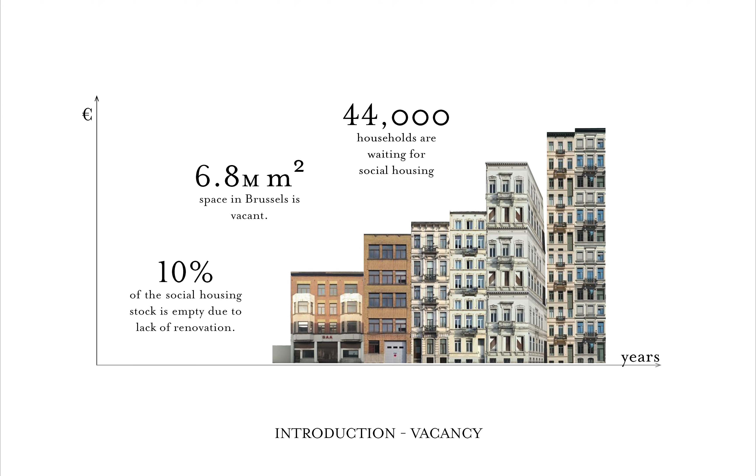In Brussels, around 20 to 30,000 of the existing housing units are simply empty because of property speculation or the owner's inability to obtain a mortgage to refurbish it.

Vacancy accelerates the decay of the building and increases the feeling of insecurity within its neighborhood. Furthermore, there is a higher chance of vandalism and crime, and eventually it makes our city centers deserted.

Owning a temporarily unused property is a problem for its owner as well because of the management costs and vacancy tax. On the other hand, empty properties are urban resources that offer temporary platforms for alternative usage, triggering entrepreneurship, creativity, allowing experimentation, and also being beneficial for the owner.

To figure out the future use and explore the possibilities that underutilized areas offer, city planners facilitate access to these spaces for the citizens living in the neighborhood, to empower and enable everyone to participate in the construction of the city. To help citizens manage the negotiation process with the owner, non-profit organizations started to emerge.

Such an organization is, for instance, Communa, based in Brussels. Their main goal is to heal the urban scars by temporarily occupying and reconditioning vacant places.

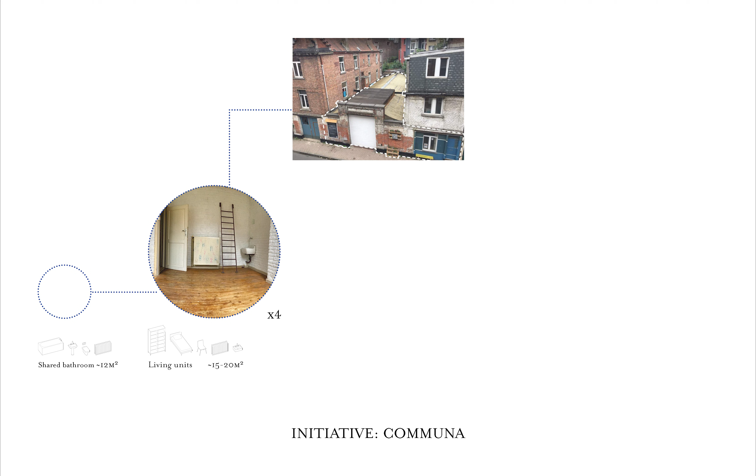This is Lasser, a recently occupied building run by Communa. It contains 4 living units to accommodate vulnerable people, co-working spaces for artists and non-profit social organizations, and a public venue with a community kitchen and a bar based on solidarity economy.

This is the most important place, which gives home to numerous neighborhood activities, public workshops, solidarity and second-hand markets, and artistic and cultural activities.

The recovery of an empty place happens as follows. Upon choosing the next possible building that seems appropriate for such an intervention, Communa contacts the owner of the property and tries to convince them about the benefits of temporary occupation, to let citizens use the property while it remains empty.

They then sign an occupancy contract and Communa co-creates the plans of the occupation together with the neighborhood and the possible future tenants. Afterwards, they refurbish the building to meet the minimal demands with the help of volunteers and the committed citizens of the neighborhood, and occupy and maintain the building for the agreed period, which can be 2 to 5 years.

As an organization mainly consisting of young lawyers and social workers, my role and contribution as an architect to their operation was a central question for me from the beginning.

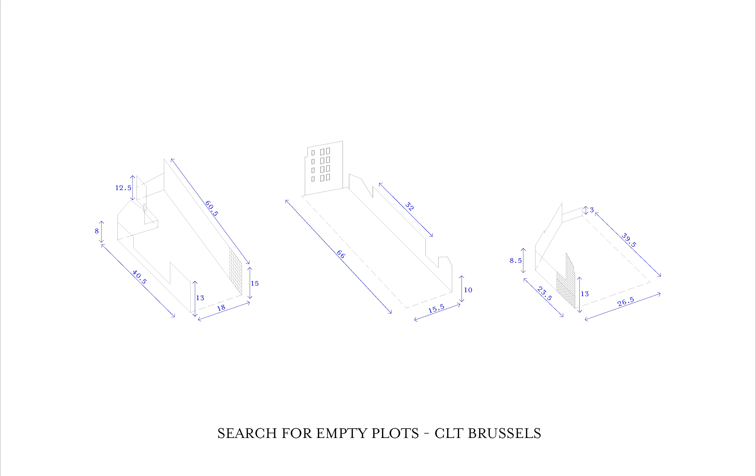geometric characteristics: long, narrow plots perpendicular to the street, with one or two fairly high firewalls on their longer sides, which offer potential for structural support.

Since the design project on the first site is the one that is still in its initial phase, I decided to continue working with this one.

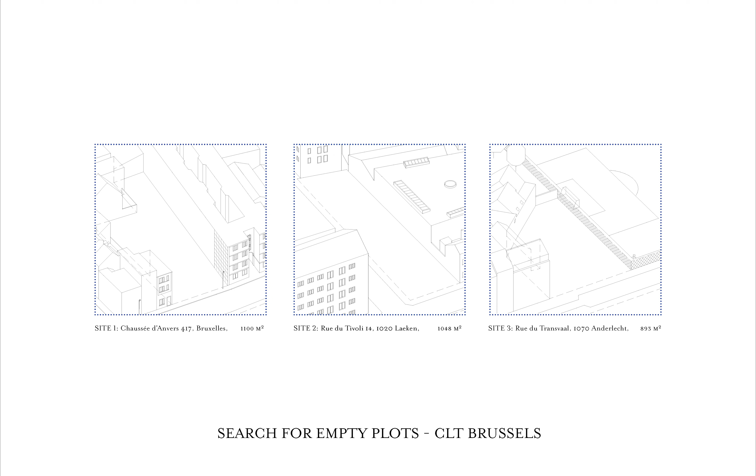The empty plots could be used to house people and families in need of accommodation, and public venues that could host community events and provide job opportunities.

The framework of the project started to take shape as we combined the timeline of Communa and CLT. While CLT is working on the feasibility study, Communa gathers possible future tenants, and together they customize the plans.

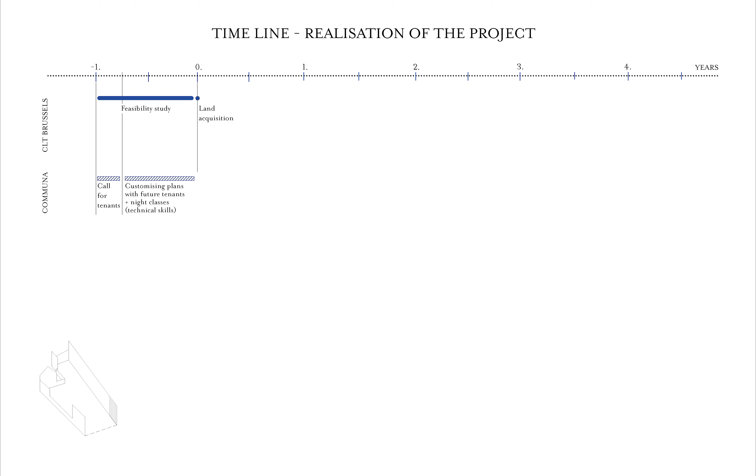The tenants will acquire construction skills on night classes. The construction starts right after the land acquisition. The assembling of the temporary building should not take longer than 1 to 3 months, so even in the worst case scenario, there would be a 2-year-long period of tenancy, but preferably 5 years. The occupation comes to an end just before the construction of the permanent building would start.

These residents could be families from the waiting list of CLT Brussels, or disadvantaged students, young adults, couples, single mothers, or homeless people who already live in shelter and need a bit of help to take the next step.

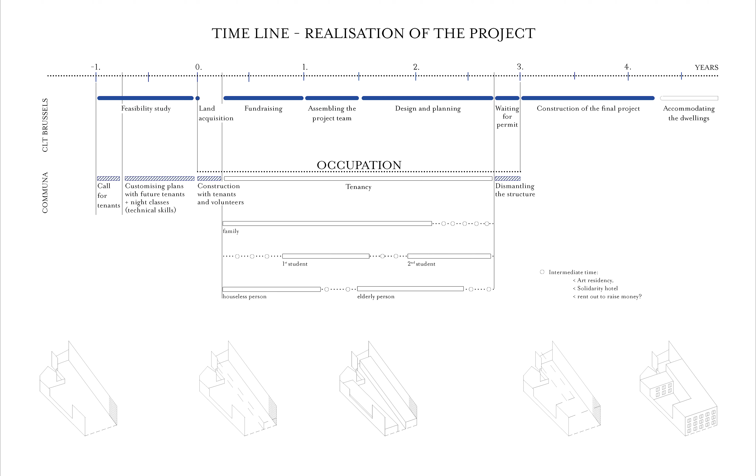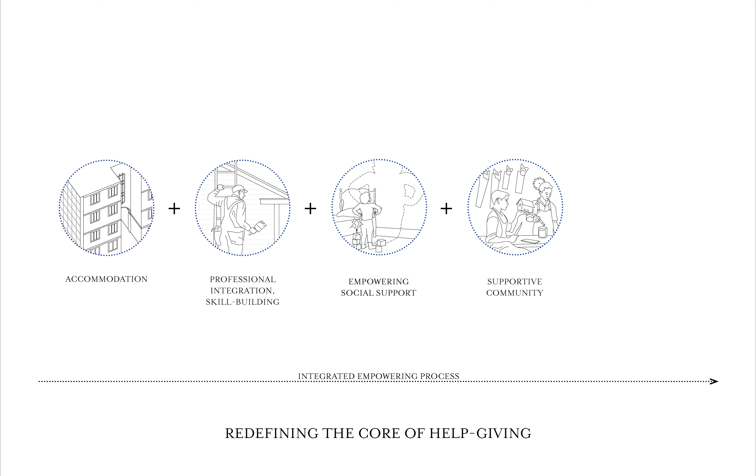The emergency living units don't just wish to offer accommodation, because that alone would not solve the issue connected to precariousness and exclusion. An integrated empowering process is needed where the accommodation is supplemented by social support, professional integration, and skill building. The whole process happens within a very open and supportive community, making sure that till the end of the occupation period, residents will be able to move to the permanent place and integrate back fully into society.

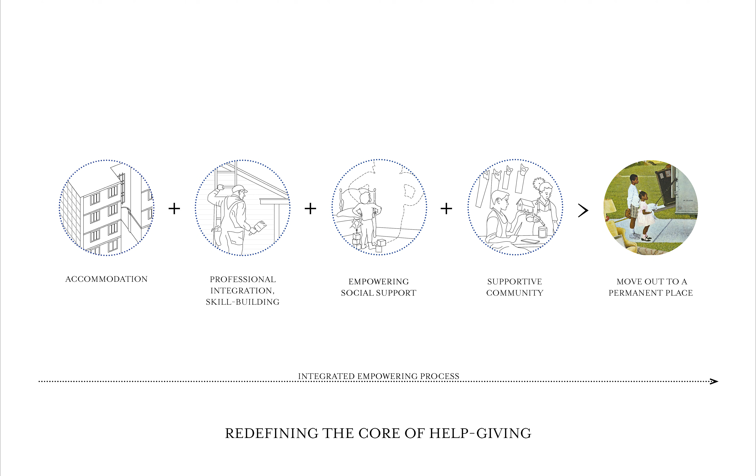Part of this process is that the residents are involved in the construction of their temporary homes, which could give them confidence and a sense of ownership, but also new skills.

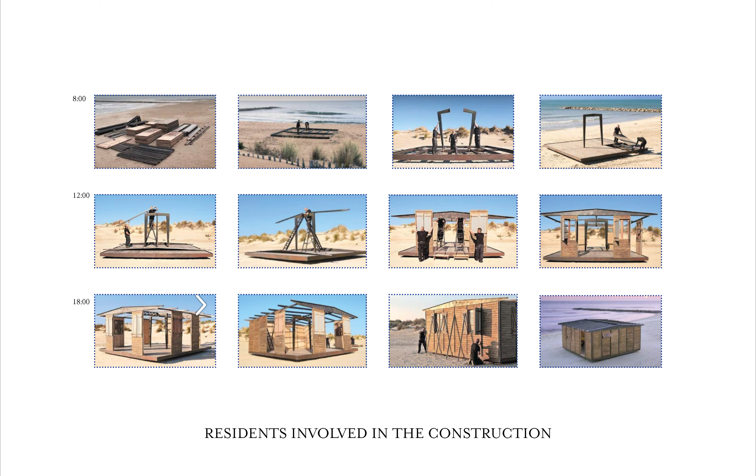Similarly, the aim for the newly formed non-profit neighborhood activities is not necessarily to facilitate the temporariness and travel from site to site, but to find a way to make them feasible and financially independent in the longer term.

To fit these conditions, I collected building components that are durable and have dismountable connections in order to be reusable, can be constructed and dismantled within a really short period of time, and that the elements should be possible to be purchased from regular building shops.

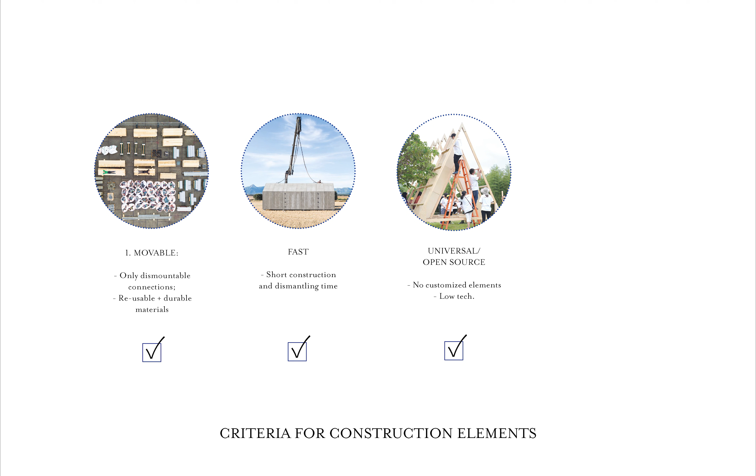At the same time, it should be low-tech, and the assembly method should have an educative community generator aspect. Lastly, it should enable a rich variety of floor plans.

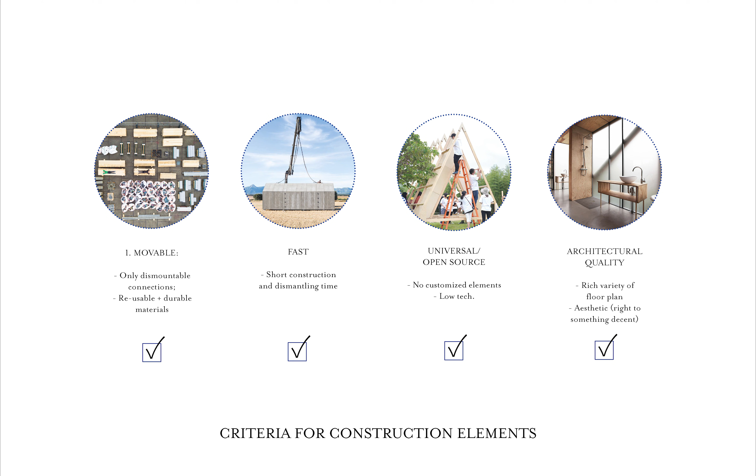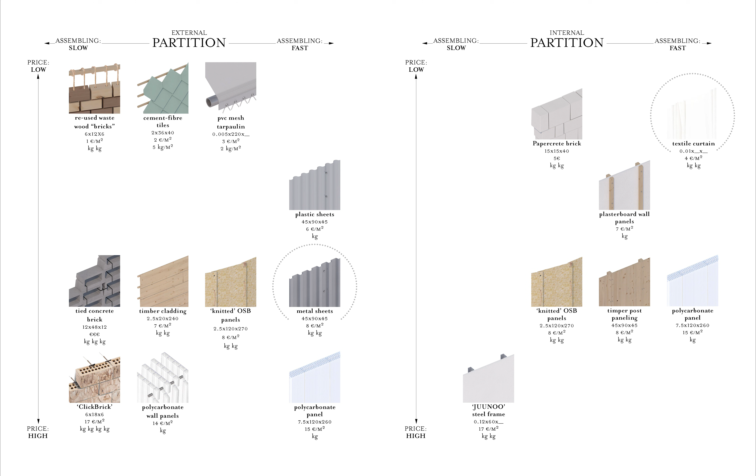Based on these criteria, I assembled a reference building catalog and evaluated their building components based on how fast it is to assemble them and how low their material cost was. I made different categories for structure, partition, infill, and foundation.

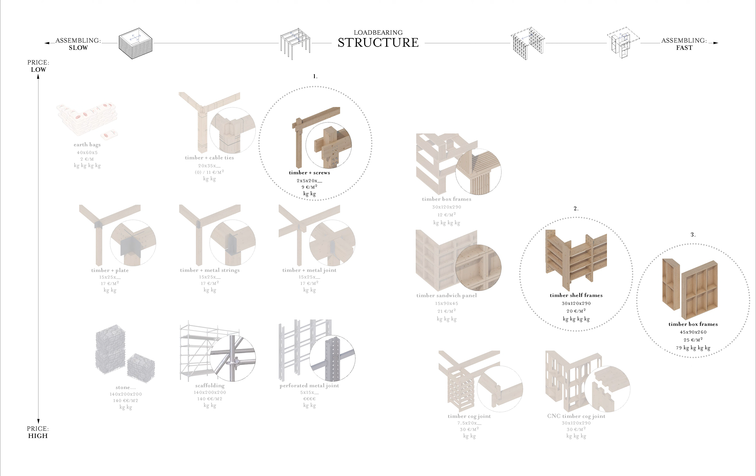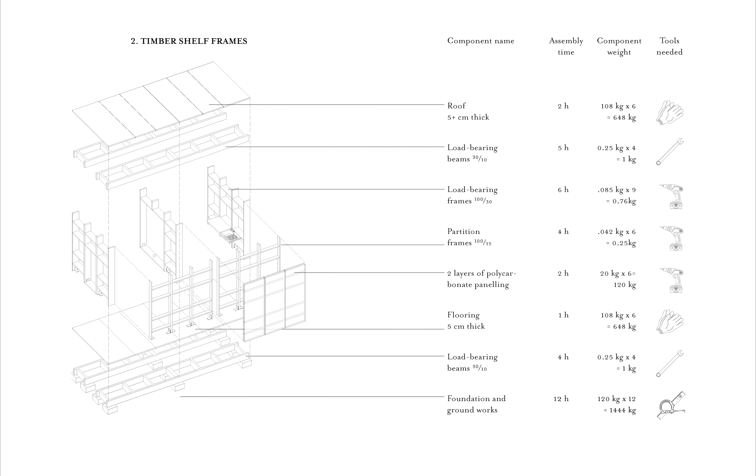Ideal components are situated along this axis. Then I chose the 3 fastest and cheapest components and calculated their weight, price, and time to construct them. After comparing the different possible volumes, the third option, the timber box frame, seemed to be the best solution.

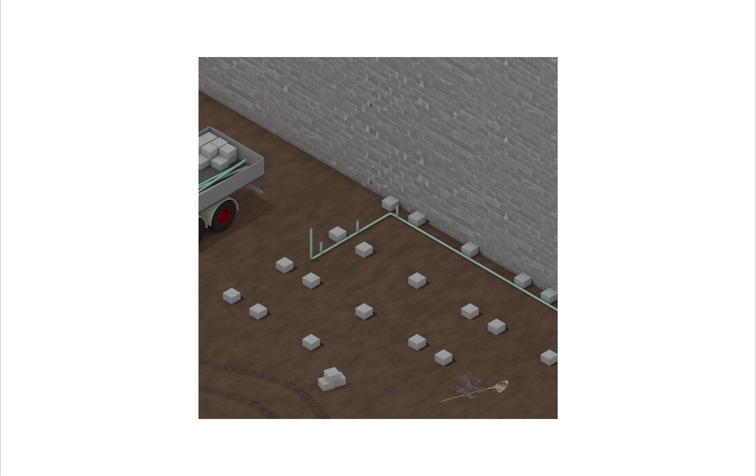So I continued working out the assembly method step by step. The construction starts with installing the foundations and the piping, followed by laying the floorboards, lifting the timber frame boxes with a mobile crane, adding the structural partitions, placing the structural boxes, and cladding with the thermal insulation between its layers.

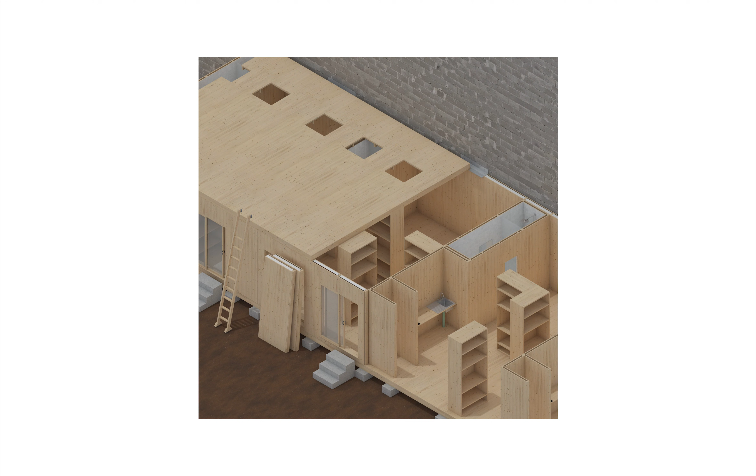The ceiling structure is carried by a firewall and the box frames on the other side. Finally, the skylights and the roof can be placed. After completion, the residents can move in and personalize the garden and their timber surfaces.

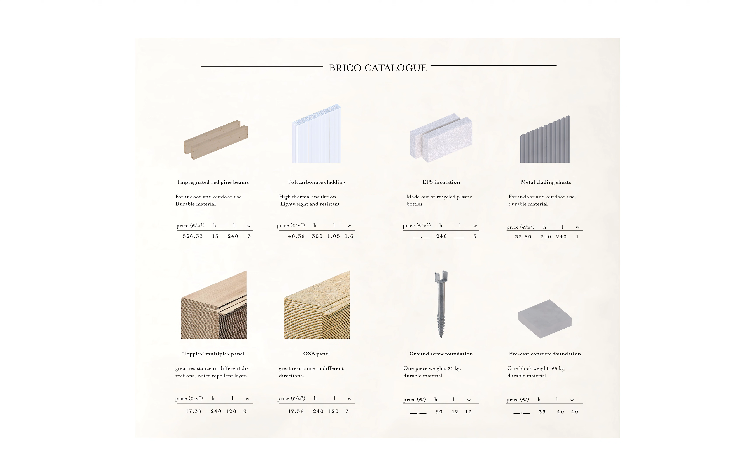The measurements of the construction elements are all synchronized to materials available at building material resellers. The grid is more visible from the top view, showing the rhythm of the structure where one unit consists of two grid elements.

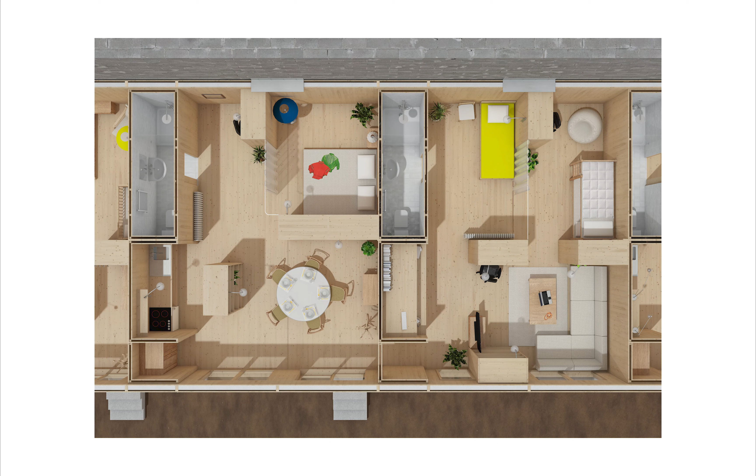The free floor plan is divided only by curtains and shelves. There are different floor plan variations for single people or couples, students, and bigger families occupying 2 units. Shelves can also serve as built-in furniture in case residents don't possess them.

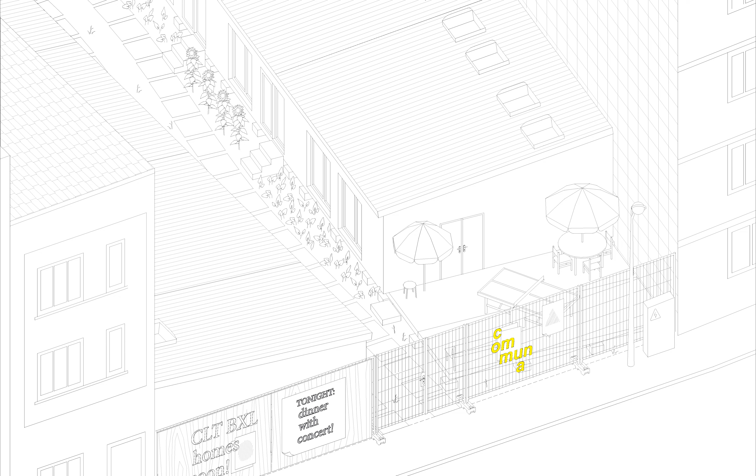The communal space is situated on the street side with a big kitchen, giving home to the public events and to shared meals. An important element is the temporary fence that serves as a communication surface about communal events and about the future CLT homes.

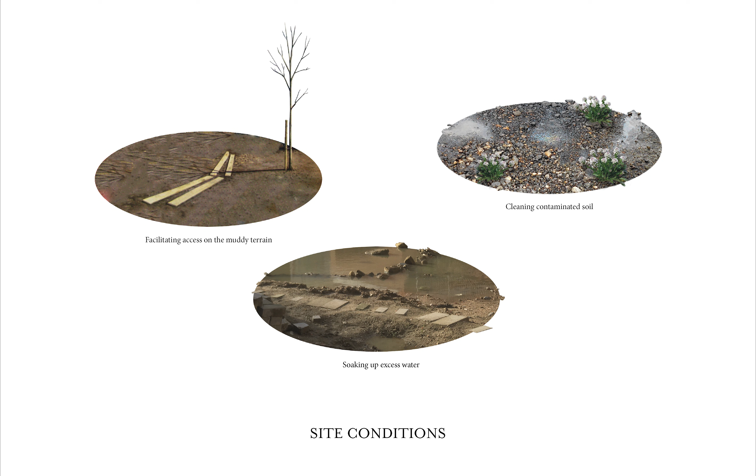The garden around the homes serves as a semi-public space, but is also a productive garden where special absorbent plants are grown to clean the possible contaminations from the soil.

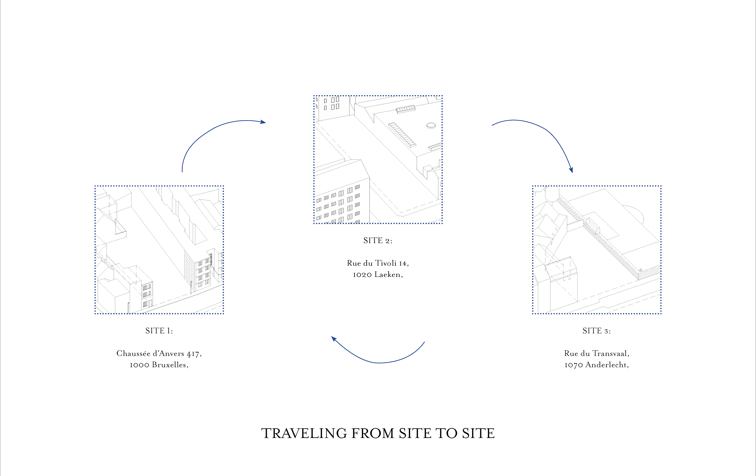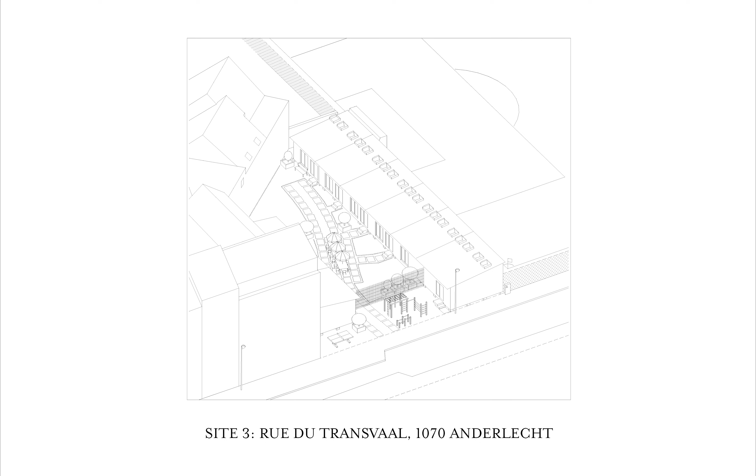The character of the garden also changes according to its urban context while the homes are traveling to different sites. It would be a playground on the site in Laeken, which is in the proximity of schools, or an outdoor gym on the site in Anderlecht, which is right next to a soccer field.

My project investigates the potential of vacancy, redefining the core of help-giving throughout self-building, while saving resources with dismountable building techniques. Thank you for listening.